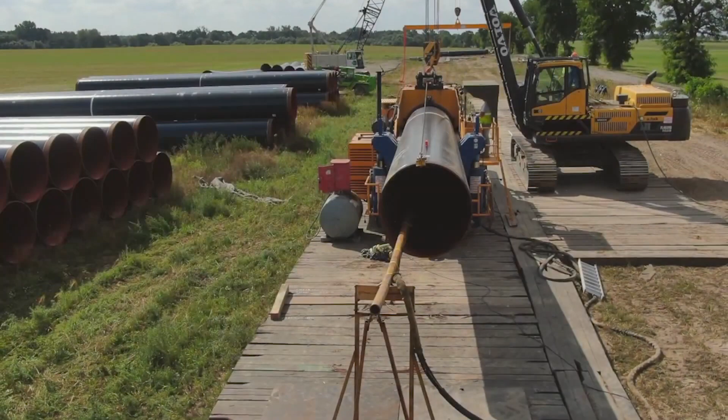Johann Bunte is one of the leading construction companies in Germany, specializing in complex infrastructure projects, especially energy-related projects. With a history of more than 140 years of development, the company has demonstrated its outstanding capacity in implementing large-scale projects, ensuring quality and progress on schedule.

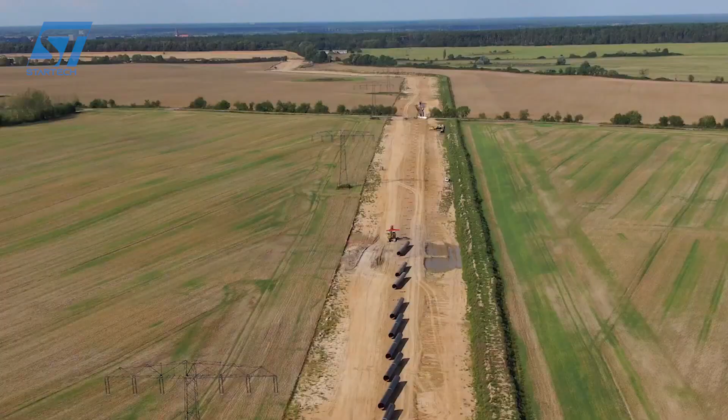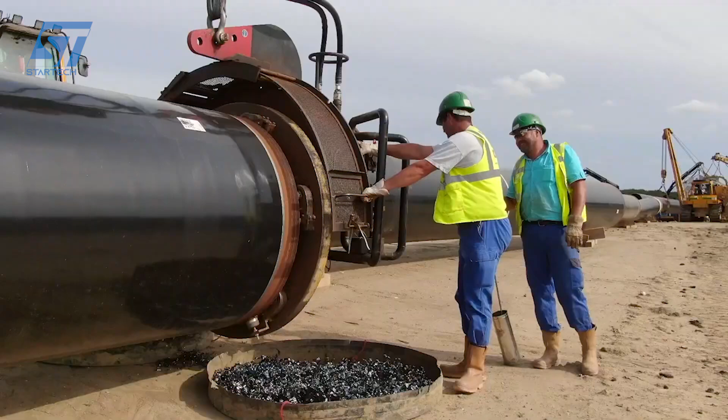One of their important projects is the installation of a 60 kilometers long double pipeline section of the EUGAL, European Gas Pipeline Link. The EUGAL project is one of the most important gas pipelines in supplying natural gas to Europe. This 60 kilometers long pipeline connects Eastern and Western European countries, playing an important role in maintaining a stable and safe gas supply. In particular, the EUGAL pipeline is capable of transporting gas from fields in Russia through Germany to other countries, helping to reduce dependence on traditional gas transportation routes.

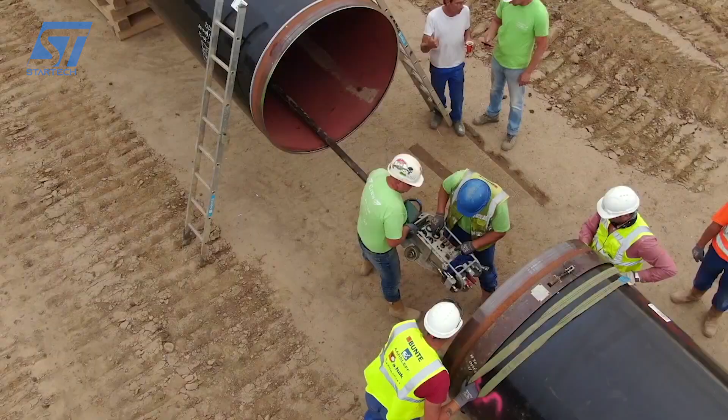The EUGAL pipeline project is not only important for supplying natural gas to Europe, but also contributes to the development of a sustainable and secure energy infrastructure. For the energy sector, this is a strategic project that helps strengthen the connection between countries, ensure stable supply, and reduce dependence on other energy sources.

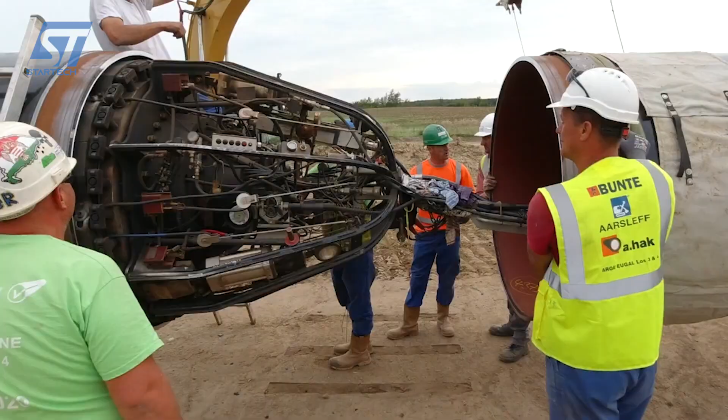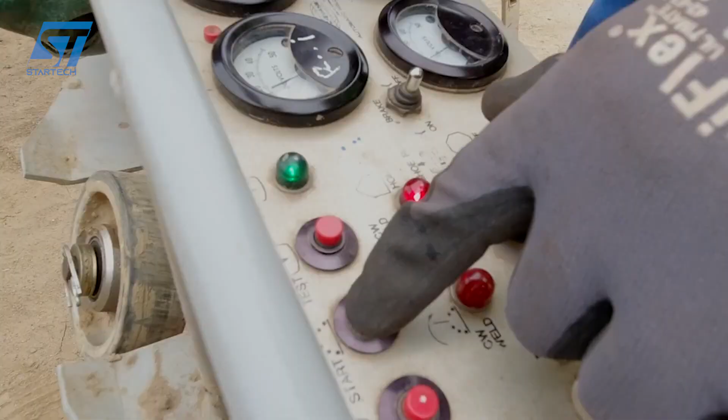EUGAL is part of a transnational energy network, helping to strengthen connectivity between regions and minimize the risk of energy shortages. In the context of Europe's transition to renewable energy, natural gas plays an important role as a transitional energy source, reducing carbon emissions compared to coal and oil.

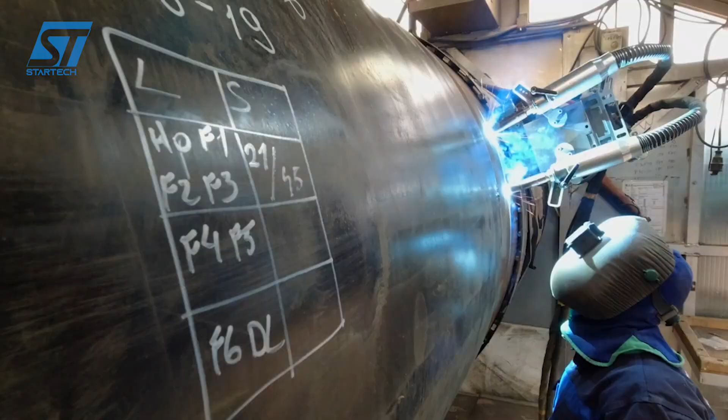Moreover, the installation of a double pipeline helps to minimize risks during gas transportation because if an incident occurs in one pipeline, the remaining pipeline can still operate normally, ensuring uninterrupted supply. The project will not only provide jobs for thousands of workers, but will also boost economic development in the areas along the route.

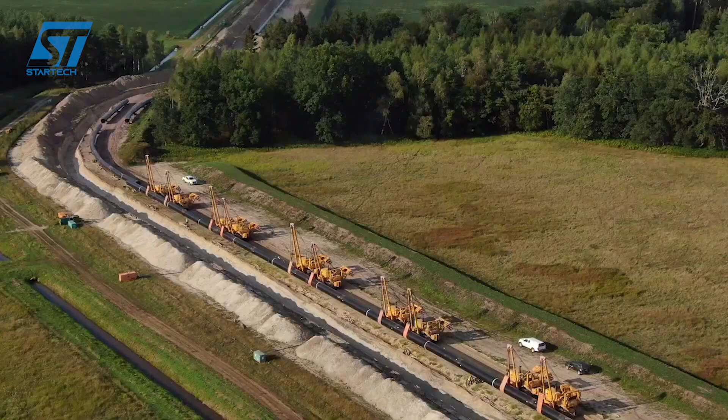Before the installation begins, Johann Bunte engineers will conduct a topographic survey and check the natural factors, including soil and climate. This will ensure that the pipeline will be installed correctly and avoid problems during construction. Once the detailed designs are in place, the pipeline is transported to the construction site and installed section by section. The pipeline sections are welded together using specialized welding techniques, ensuring tightness and safety.

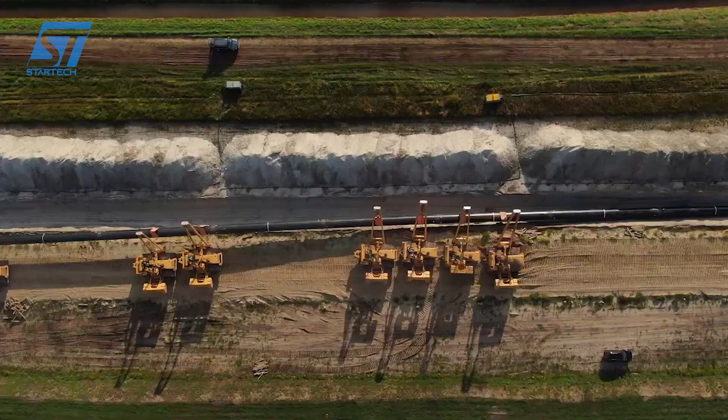With a total length of 60 kilometers, the project uses the most modern technology to install two parallel pipelines. Large trenches are dug to ensure that the pipeline is placed in the correct position and at the correct depth. Modern welding technology ensures that the pipeline joints are not only durable but also meet the highest safety standards.

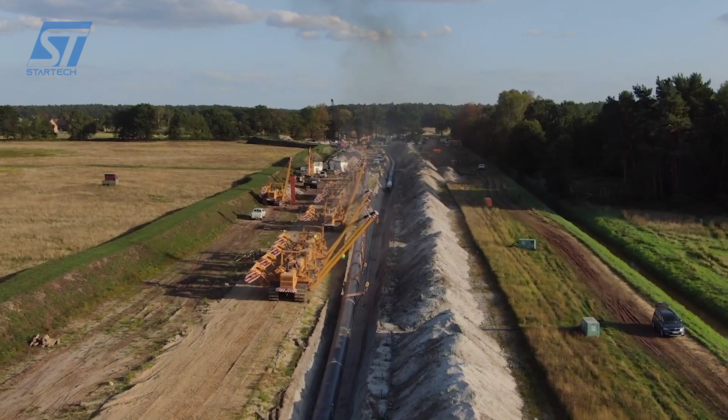To protect the pipeline from environmental influences such as corrosion, a protective coating is applied to the pipe surface. This coating can be a plastic layer or a special paint layer, depending on the requirements and environmental conditions. After pressure and tightness testing, the pipeline is lowered into the trench and covered with soil. This process is closely monitored to avoid affecting the surrounding environment.

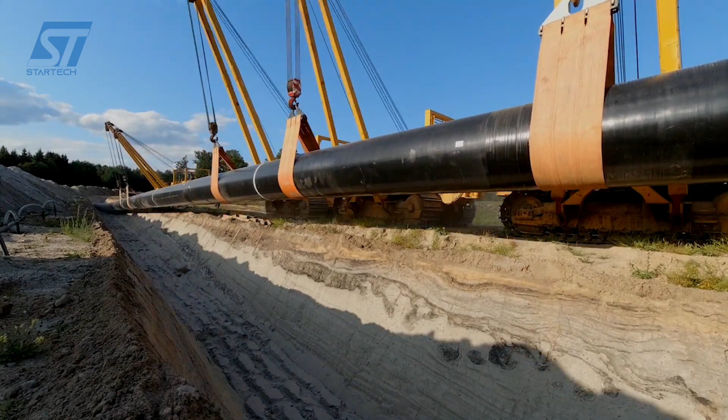In sensitive areas such as rivers, roads, or residential areas, the company uses HDD underground drilling technology to minimize environmental impact and ensure safety. Johann Bunte is not only involved in the installation but also provides maintenance and monitoring services for the pipeline throughout the life of the project. The company uses modern sensor technology to monitor the condition of the pipeline and promptly detect possible problems.

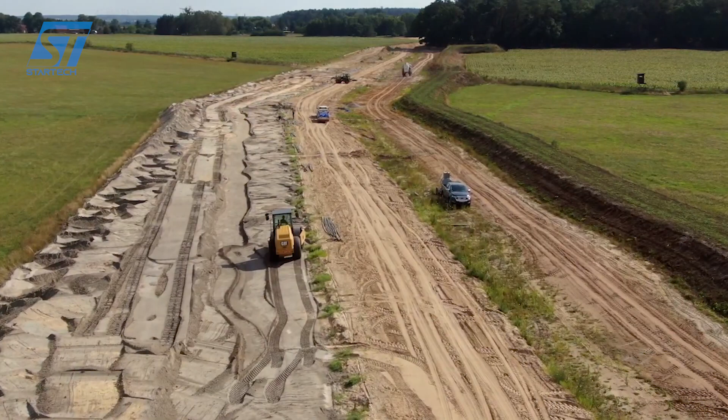The EUGAL gas pipeline project is not only a complex engineering project but also a symbol of sustainable development and international cooperation. As a leader in infrastructure construction, Johann Bunte is proud to be part of this important project, contributing to ensuring a safe and stable energy supply for Europe.

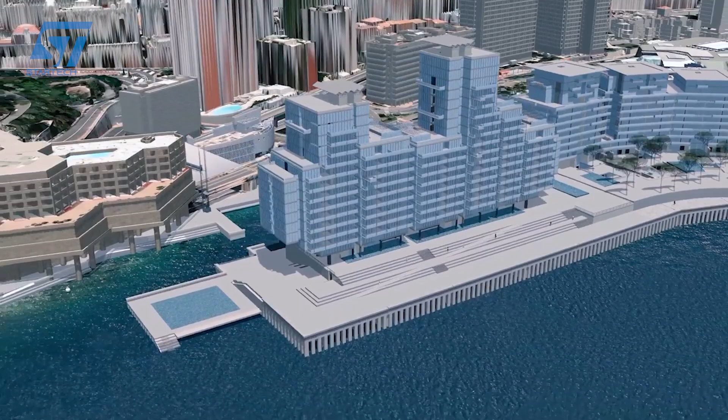Bouygues Travaux Publics is one of the world's leading construction companies, specializing in complex infrastructure projects, especially the construction of ports, bridges, and offshore structures. One of their most notable projects is the Monaco Seaward Expansion, a project of technical and environmental significance. Monaco, with an area of only 2.02 square kilometers, is always looking for ways to expand its urban space.

The project aims to create 6 hectares of new land on the sea for the development of housing, offices, public spaces, and ecological conservation. Bouygues TP was assigned to the project, not only because of its outstanding capabilities, but also because of the company's commitment to environmental protection and the use of innovative technology. The project is divided into 5 phases, detailed below.

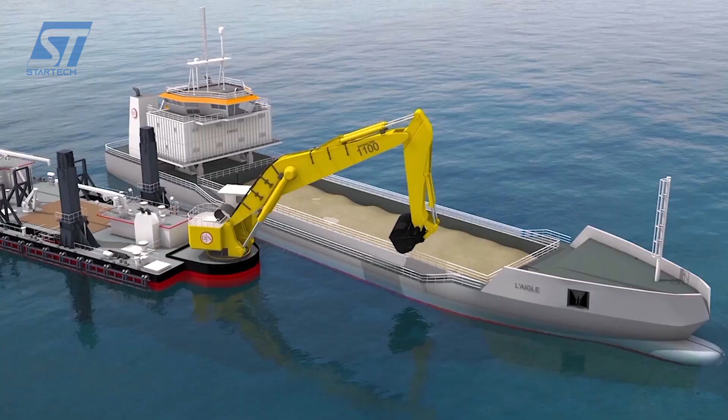Phase 1, Survey and Planning. Bouygues TP's engineering team carried out a detailed survey to understand the geological structure of the seabed, ocean currents, and the impact on the marine ecology. The technical plan was designed to ensure safety and optimize the construction space, while minimizing negative impacts on the environment.

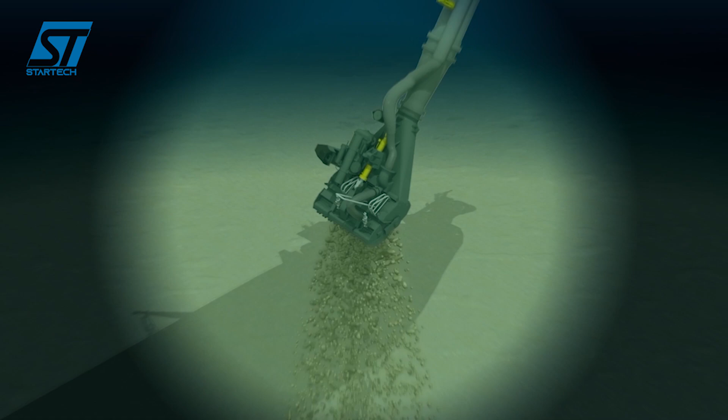Phase 2, Breakwater Construction. One of the most important parts of the project was the installation of the caissons, giant concrete cubes. A total of 18 caissons, each 27 meters high, 26 meters long, and weighing up to 10,000 tons, were prefabricated and towed into place by specialized ships. The caissons were placed precisely in place using advanced GPS positioning technology.

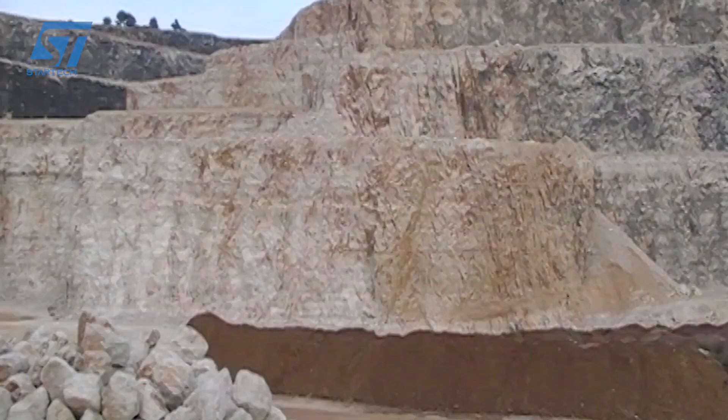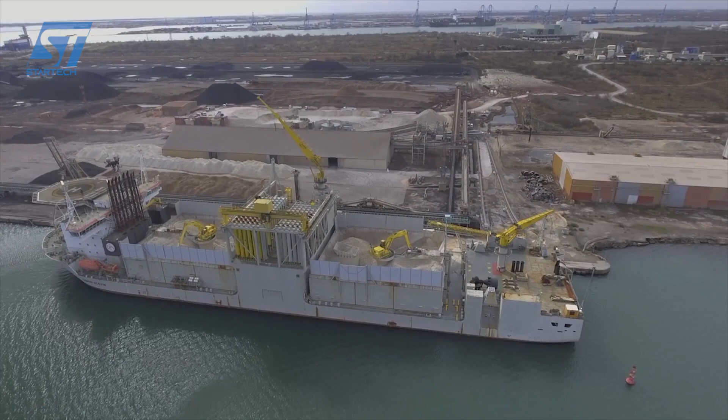They were then filled with sand to provide stability and resistance to large waves. The breakwater was covered with rocks and special layers of materials to minimize the impact of waves and prevent erosion.

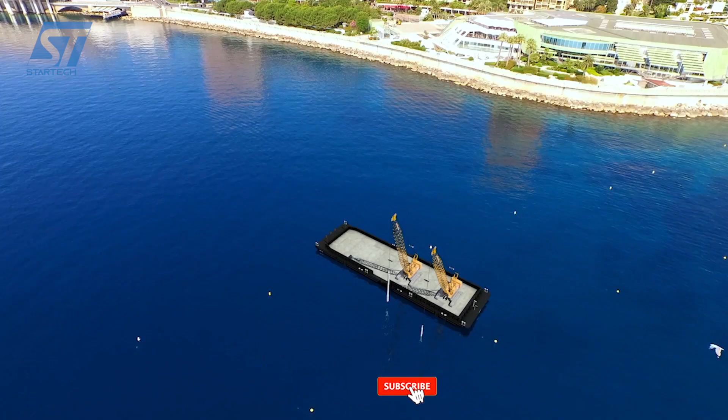Phase 3, Backfilling and Foundation. Sand is pumped from offshore mines into the caissons area to fill the space, creating a land adjacent to the shore. After the sand is filled, the soil is compacted to ensure the stability of the structures on the surface. Underground water pipes and channels are installed to prevent seawater intrusion, ensuring long-term safety.

Phase 4, Infrastructure Construction. Roads, parks, and public areas are built to serve the needs of living and transportation. Modern buildings are built, in line with the architecture and style of Monaco. The project integrates green technologies such as solar energy systems and wastewater recycling.

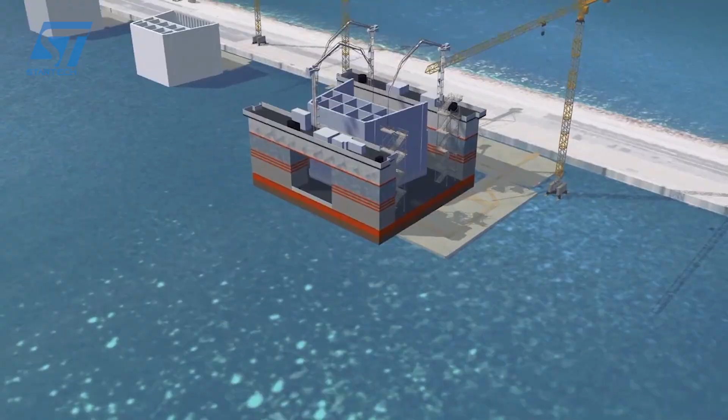Phase 5, Environmental Restoration. Bouygues TP has installed artificial reefs around the breakwater to create a new habitat for marine life. Environmental experts are constantly monitoring to ensure the project does not harm the ecosystem. Bouygues TP uses submerged caissons technology, an effective solution in reducing the impact on the seabed and maintaining long-term stability.

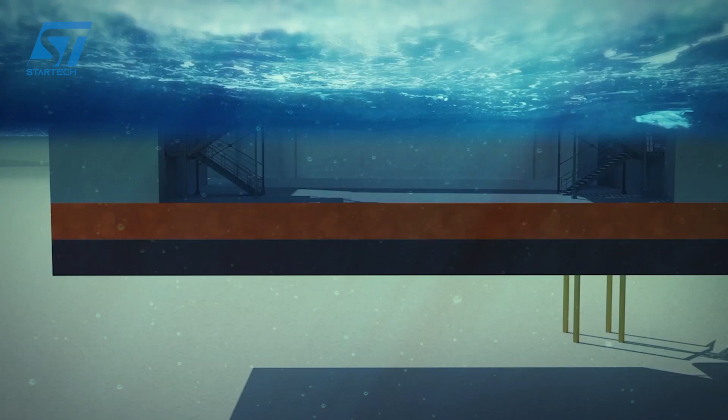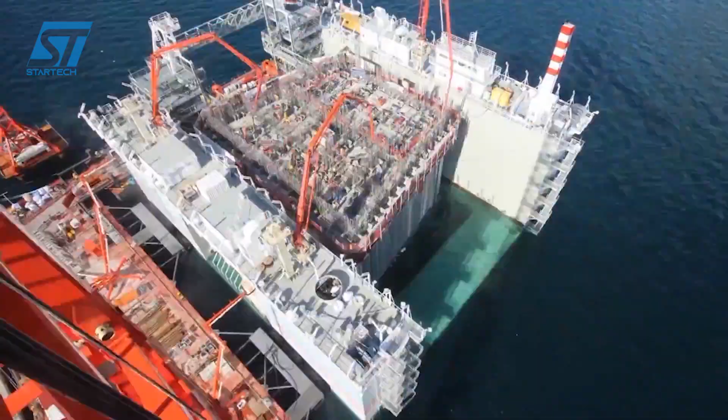The breakwater is the main structure that protects the reclaimed area from the impact of waves and high tides. All concrete used in the project has a low carbon ratio and is produced with recycling technology. They also apply modern construction technologies such as BIM, building information modeling, 3D printing, construction robots, to increase productivity, ensure

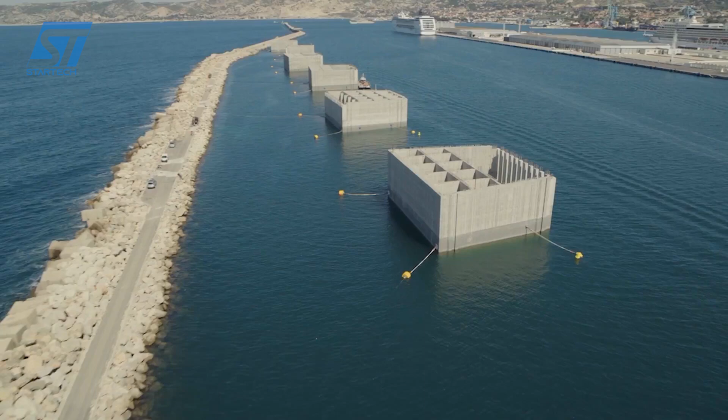quality, and minimize risks. The project has helped increase the area of high-value land, providing space for high-end residential and commercial projects, helping to boost the Monaco economy, providing more living and entertainment space for people, helping to improve the quality of life in Monaco.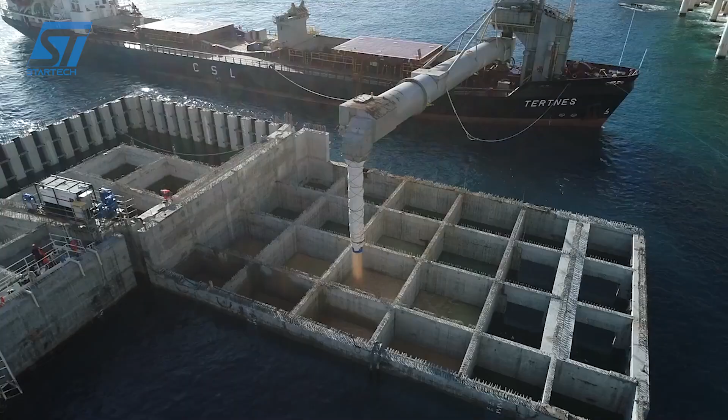This is also a model for sustainable construction projects at sea, with a commitment to preserving and improving the marine environment. Bouygues TP's Monaco offshore expansion project is not only an engineering feat, but also a symbol of the balance between development and conservation. With innovative solutions and a focus on the environment, Bouygues TP is setting a milestone in the field of maritime infrastructure construction, contributing to the sustainable future of Monaco.

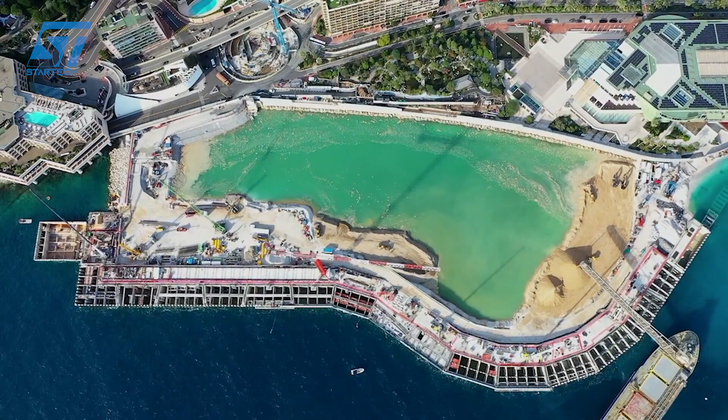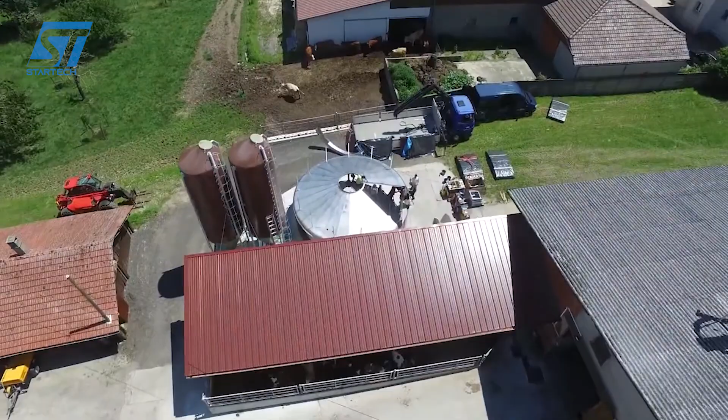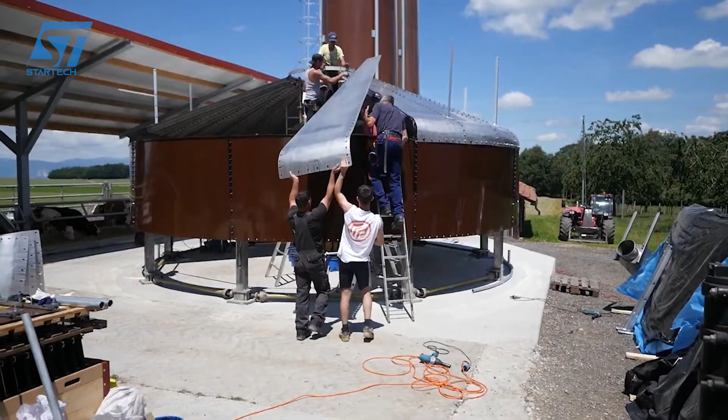GB Silo System AG is a leading company specializing in the design, construction, and installation of large-scale silo systems. These silos are used for the storage of grains, seeds, and other agricultural products. Known for their high-quality engineering and innovative technology, GB Silo System AG has established itself as a trusted partner for farmers, cooperatives, and agro-industrial enterprises worldwide.

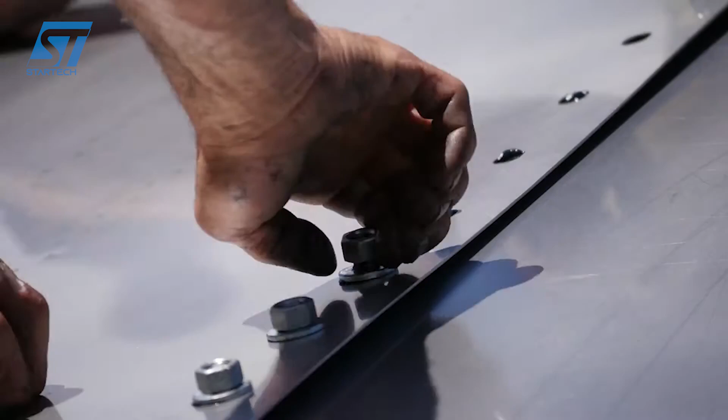GB Silo uses the most advanced technology to ensure the quality and operational efficiency of silo towers. The steel plates are coated with anti-corrosion zinc, helping the silo towers withstand harsh environmental conditions such as high humidity, temperature fluctuations, and chemicals in agricultural products. CNC precision machining technology ensures that the steel plates are cut and punched with high precision, easy to join during installation. Heavy-duty galvanized bolts ensure long-term structural durability.

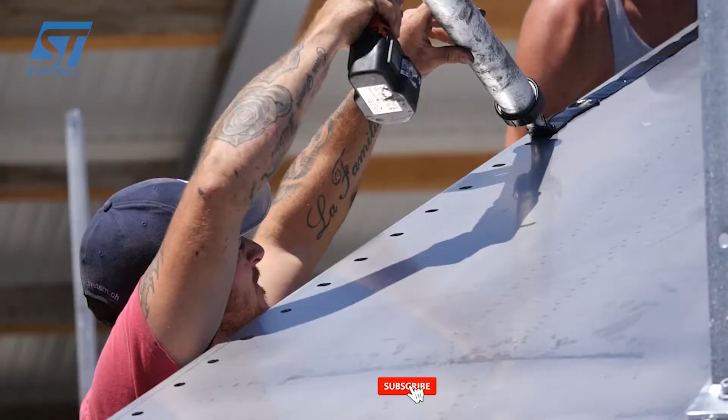Silos can be tailored to specific requirements, such as capacity, height, and diameter. Options for flat-bottom or hopper-bottom silos depending on the application. Hermetically sealed systems to preserve product quality and prevent contamination. Integrated aeration, temperature monitoring, and pest control systems for optimal grain storage. Ventilation and cooling system maintains stable temperature and humidity, preventing mold and insects.

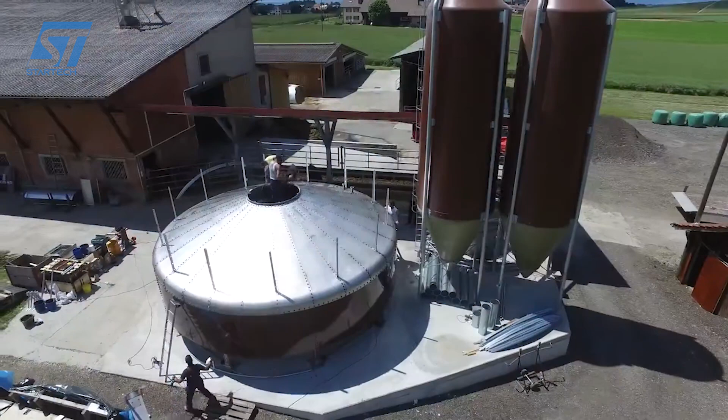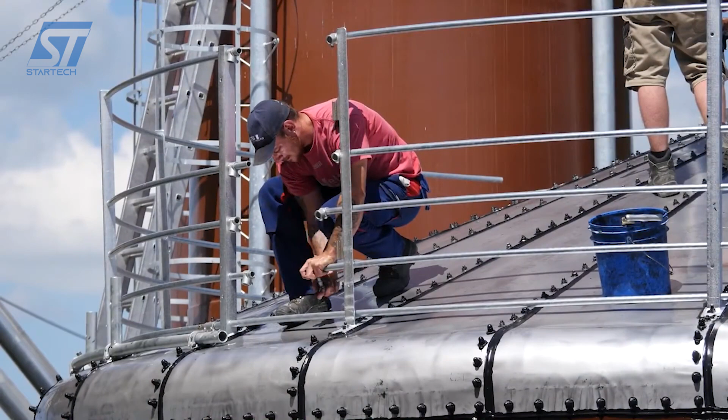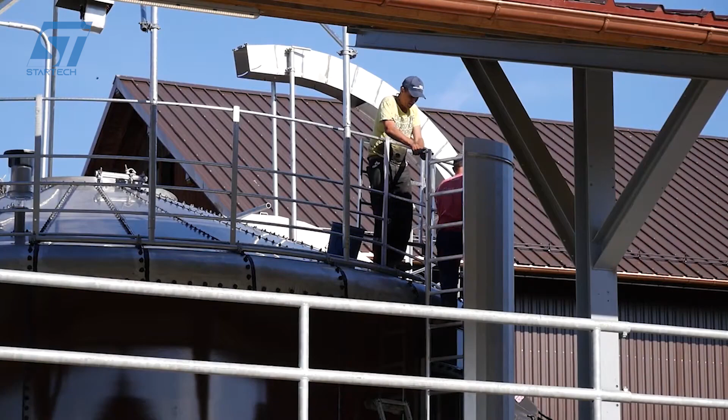Smart sensor system helps to continuously monitor temperature, humidity, and pressure inside the silo, providing real-time data to managers. Designed to store thousands of tons of agricultural products, supporting large-scale farming and industrial operations. Components such as wall panels, roof sheets, and structural reinforcements are prefabricated in a controlled factory setting, ensuring high quality and faster on-site assembly. Silos are constructed using modular panels that are easy to transport and assemble on-site. Modular design allows for scalability, enabling future expansion.

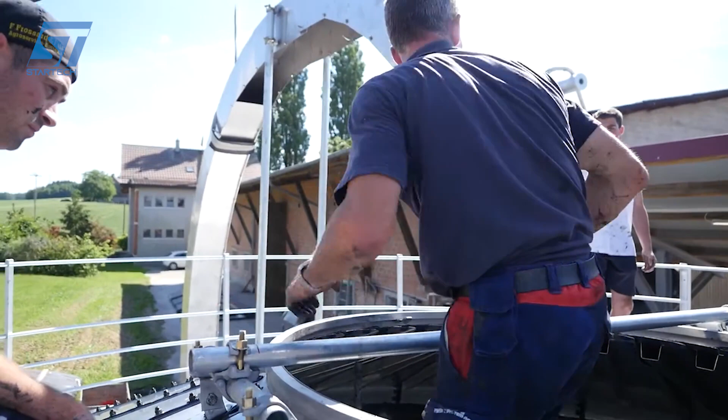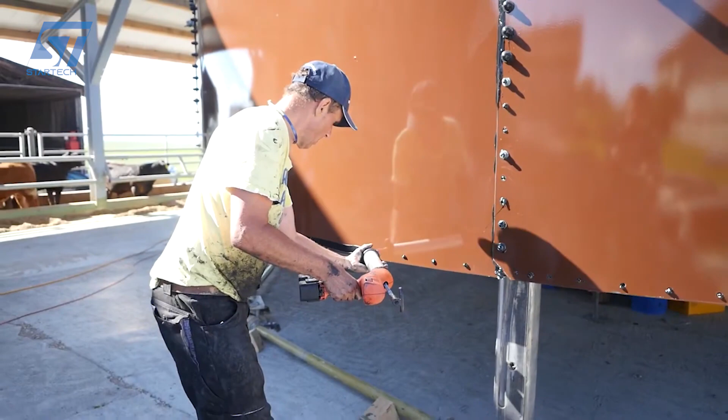GB Silo's silo tower installation process is carried out professionally and scientifically, ensuring safety and efficiency. The company's team of experts conducts a survey of the terrain, environmental conditions, and storage needs of customers to come up with a suitable design. The installation area is reinforced with a solid foundation, ensuring the load-bearing capacity of the silo tower.

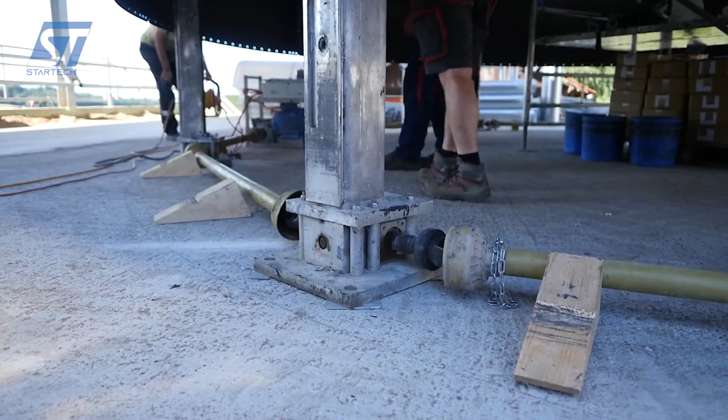Silo components are manufactured at GB Silo's factory with modern technology, then strictly inspected for quality before being transported to the construction site. Panels are transported to the site and bolted together using specialized high-strength bolts. A crane is often used to assemble the upper sections and install the roof structure. The silo roof is assembled with pre-sloped sheets to facilitate water runoff.

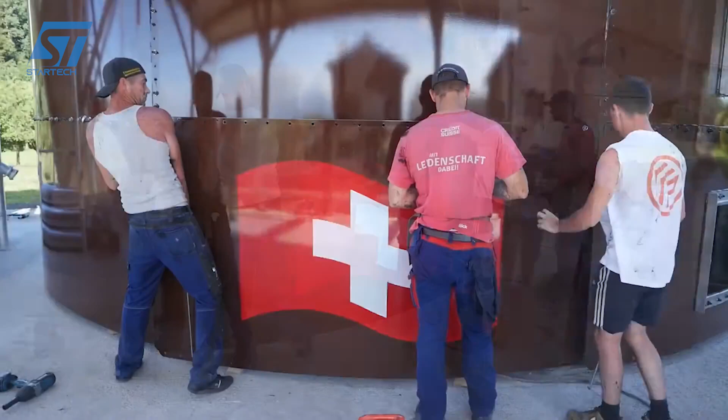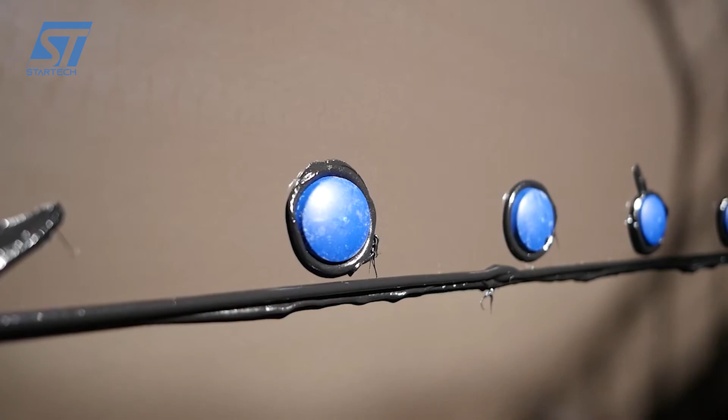A high-performance sealant is applied to the joints between the panels to ensure airtightness and water resistance. The roof panels, typically made of steel or concrete, are assembled and lifted into place. Ventilation systems are installed to regulate temperature and humidity within the silo, preventing spoilage and pest infestation. Efficient loading and unloading systems, such as conveyor belts and pneumatic systems, are integrated into the silo design.

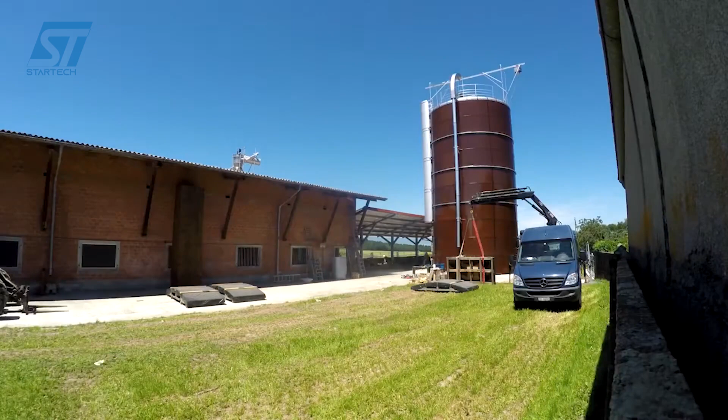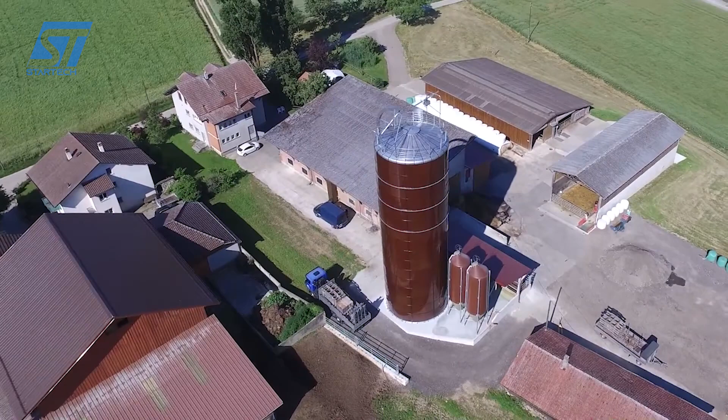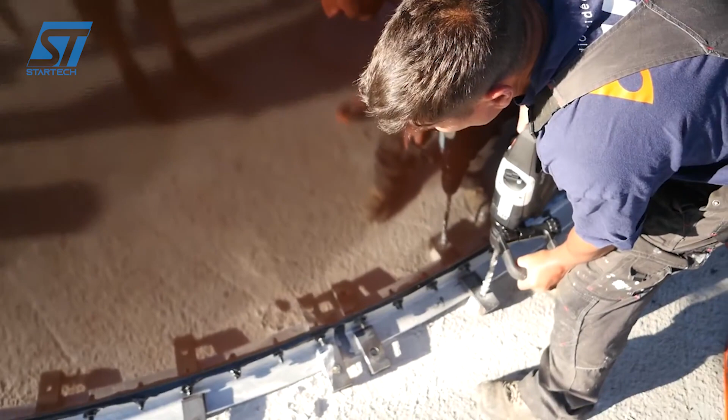Cleaning systems are installed to maintain the cleanliness and hygiene of the silo. Advanced monitoring systems are implemented to track temperature, humidity, and other critical parameters, ensuring optimal storage conditions. Structural integrity tests are conducted to ensure the silo can handle the specified load. Calibration of aeration and monitoring systems for optimal performance. GB Silo applied key technologies in the process.

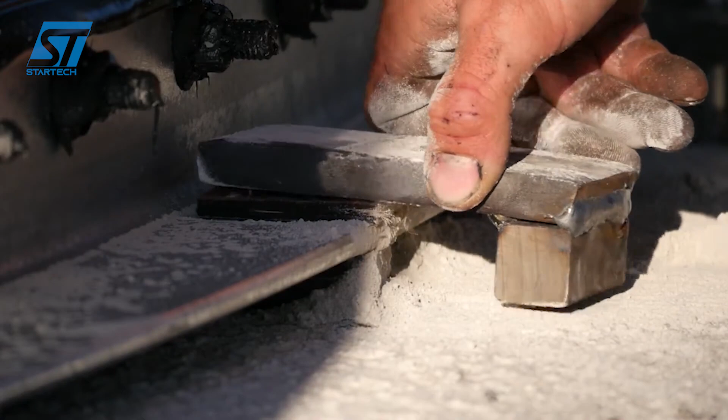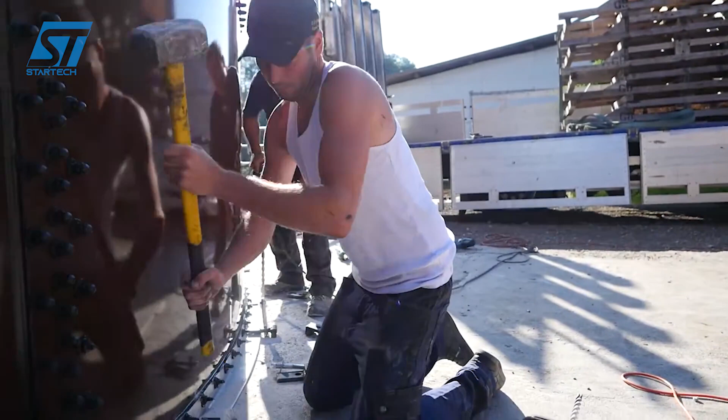Sophisticated 3D modeling software is used to optimize the silo design, ensuring structural integrity and efficient material usage. High-precision steel fabrication techniques, including laser cutting and robotic welding, are employed to produce high-quality components. Advanced sealing technologies are used to create airtight and watertight seals, preventing moisture ingress and product degradation. Energy-efficient ventilation systems are designed to maintain optimal air quality and temperature within the silo. Real-time monitoring systems provide valuable data on silo conditions, enabling proactive maintenance and management.

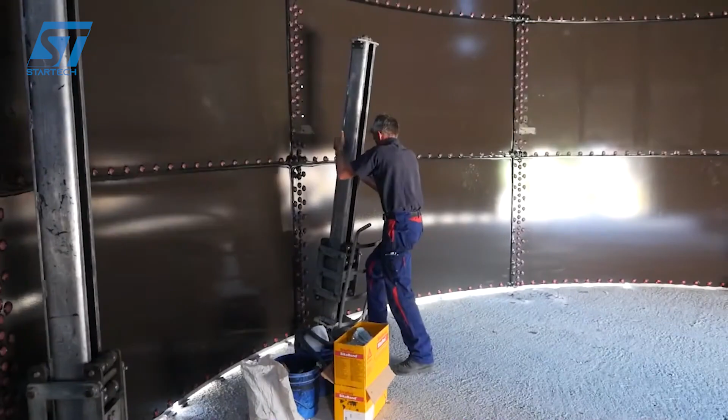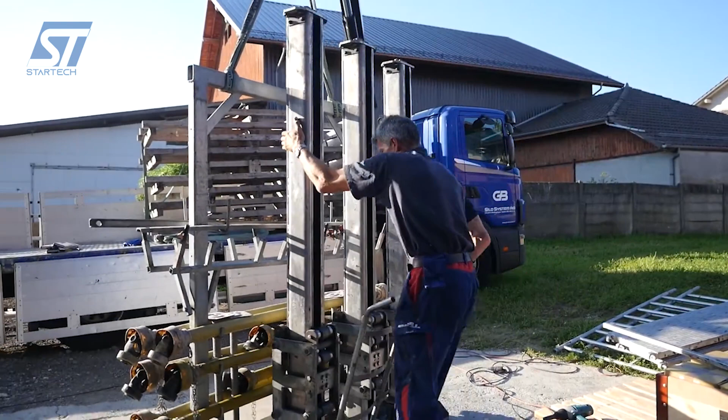GB Silo Systems has certain benefits. It protects grains and seeds from pests, moisture, and mold, reduces post-harvest losses, and optimizes storage capacity. Modular designs allow for easy expansion as storage needs grow, and it offers remote monitoring and control for enhanced operational efficiency. By combining cutting-edge technology with experienced craftsmanship, GB Silo System AG delivers reliable, durable, and efficient silo solutions that meet the highest industry standards.